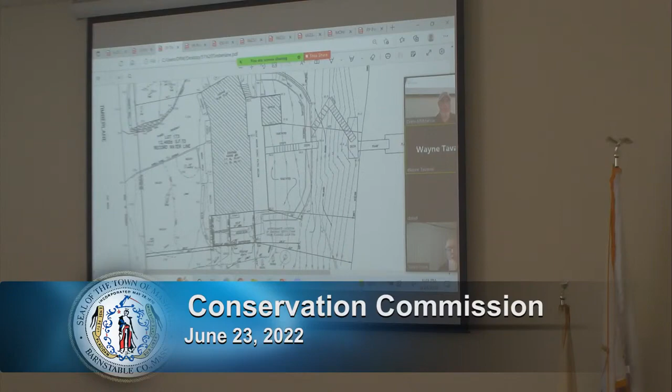There are some areas on the plan identified as vegetated. Right there, that is landscape area, ground covers, so it's not naturally vegetated. So between that area and the area in the understory to the south of the path, right there, are available, and we put notes in the narrative identifying that we'd like to work with staff to plant whatever native plantings are appropriate and commensurate with the addition we're proposing. I think that sums up my presentation, and I'm happy to answer any questions.

Thank you. Drew, comments? So just to show some images of the site—it is pretty steep. It's inland bank, the resource areas, buffer zone to top of inland bank.

If you haven't been out to the site, It is a very well vegetated inland bank. There's no erosion concerns on this bank. I don't even think there's been any disturbances for maintenance around the existing stairway, which is shown on the plan here. This is the access to the dock. So in this area of the bank is very well vegetated.

As Mike had said, using the calculation formulas, it's calculating out a square footage that the property simply doesn't have space for. So what we discussed was coming up with a plan to use the available space for mitigation. It's mostly shady, so we'll have to look at shade-tolerant varieties of native species and come up with a mitigation plan, which I put in my recommendations as a condition of approval.

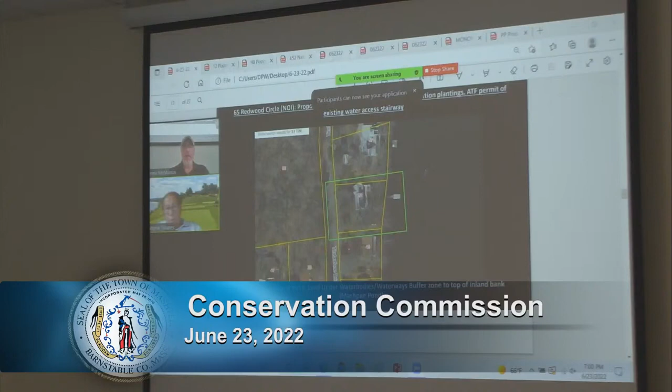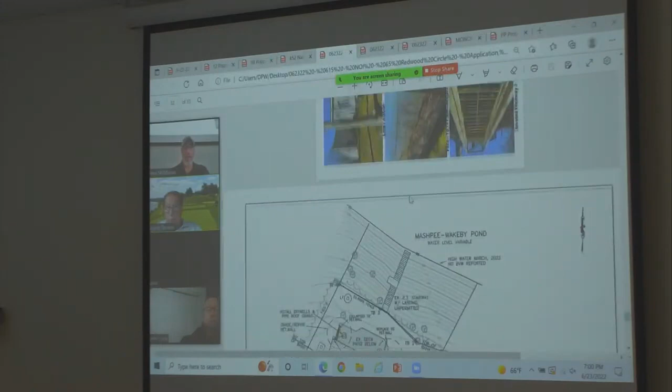Okay, I've got the existing conditions and proposed plan up on the screen now. Can you see that, Wayne? I see the map. Okay, that's the site plan. I'd like to see my plan if I could. The proposed? Okay, thank you so much.

So again, they're 50 years old. The owner had thought they were grandfathered. And then in the course of discussing with Drew, he mentioned that 4 feet is a legal width for these type of stairs, and that he would like to see proof that this landing would be cut in half to the 4 foot width. Was that it, Drew? Is that what you were thinking on that? That was the only issue I had that we hadn't discussed, and it was something I just happened to notice on the site visit that I didn't see the first time around. I just didn't pick up on it. So, yeah, in order to keep the stairway in compliance with the standards of design under the bylaw, it has to maintain a width of 4 feet.

The only exception to that is when you have a jog that's necessary to avoid trees. Again, that would be a 4 foot, but this is just clearly a platform, so we want to make sure that we're consistent in this approach for standards of pathways, stairways through naturally vegetated areas. Sure. Okay, thank you so much.

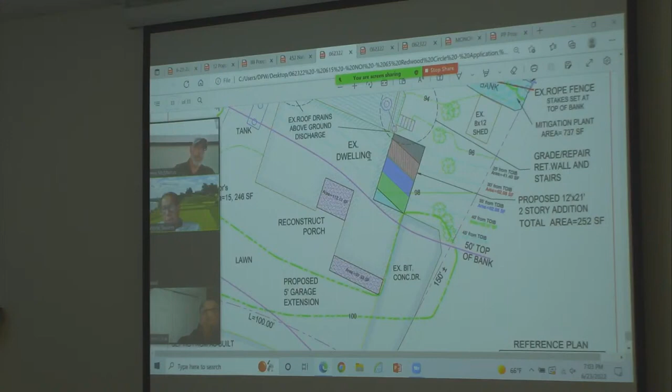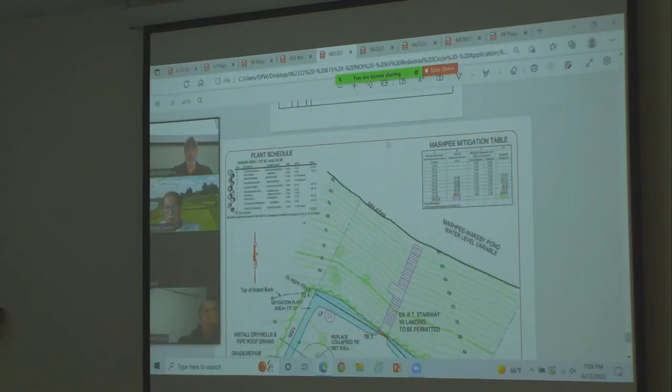Could we scroll up a little bit to the tables? I use your formula, the every 5 feet formula. It's on the right-hand side, Mashpee mitigation table, if we can blow that up a little bit. And all these areas were documented. Oops, sorry. Blew it up a little too much. Not sure what's happening with the image. Sorry, Wayne, yep, a little out of focus. Let me go back and reopen it and see if that works.

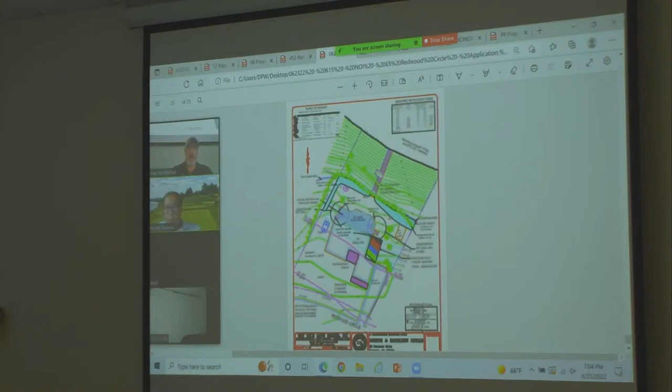Drew, I'm going to try this. Oh yeah, you're doing it now. Okay, sorry, I'm not sure what happened to the image quality there, but we all have a hard copy we can flip to and have hard view copies too, Wayne. Okay, alright, I'm going to try to do this again. Do you mind signing off, and I'll try to get on? I found mine, sure, you're ready. Ready when you are. Okay.

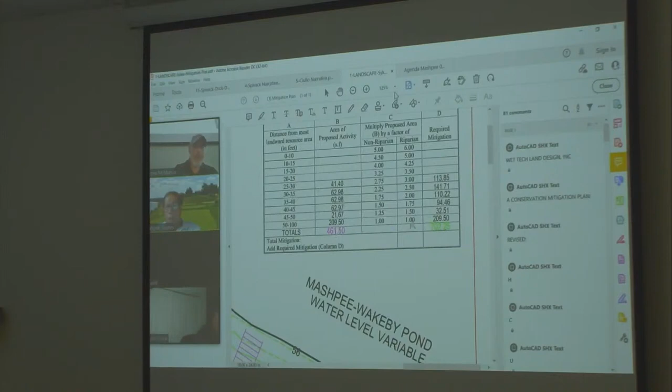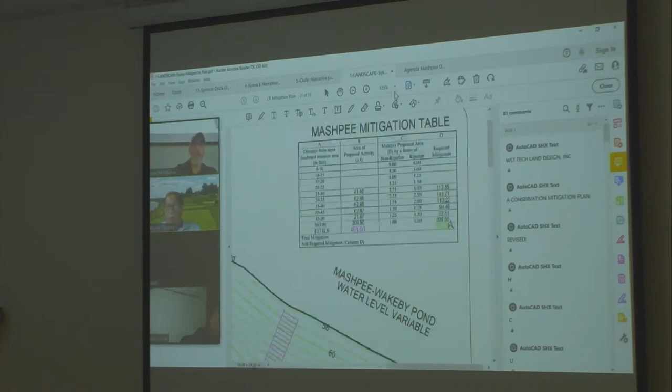Okay, we're here. So that's the table, and I went every 5 foot, as you mentioned, 25 to 30, and 30 to 35, so on and so forth. And we came up with these totals, and the corresponding, we used the non-riparian formula here, 2.75. All that comes out to 702 square feet of mitigation that's required. So am I doing okay with this? Yeah, moving around? Yep. Okay, so we have a shrub table here that we also did.

I like to do the shrub table with the spacing and so forth. It shows that 702 square feet are required, 737 square feet are provided. We have 29 total plants, with the list of botanical name, common name, size, spacing, etc. Everything that should be used.

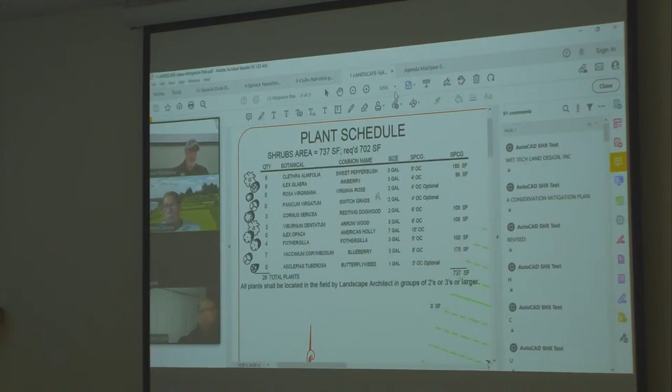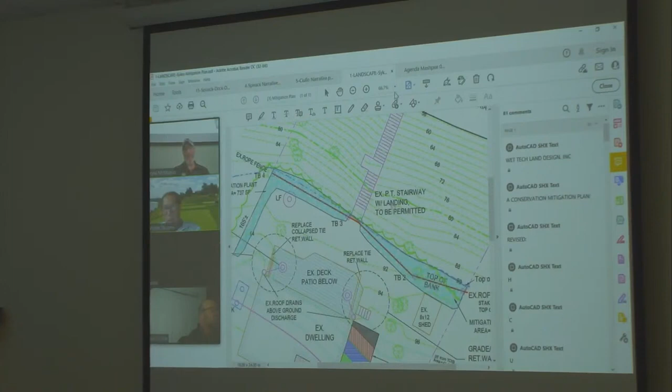The light blue area, or if you use AutoCAD, they call it cyan, is the area of mitigation that equals 737 square feet. This area is divided into 5 foot increments, each one colored so you can see the difference in area. We need to remove one tree.

It's to the right for access to this area. The owner is also asking about a double tree out here by the existing 8x12 shed. This just came up. One of the two trunks on the twin is decayed, and we would like to have that removed at the same time the tree in the front is removed. So two added features that don't show on the plan we'd like to bring up at this time.

Other than that, we'd like to get credit for the 112 square feet that is already covered. It's coverage already, just to be built upon with the addition. We'd like to change the table and reduce mitigation as any owner would like to do.

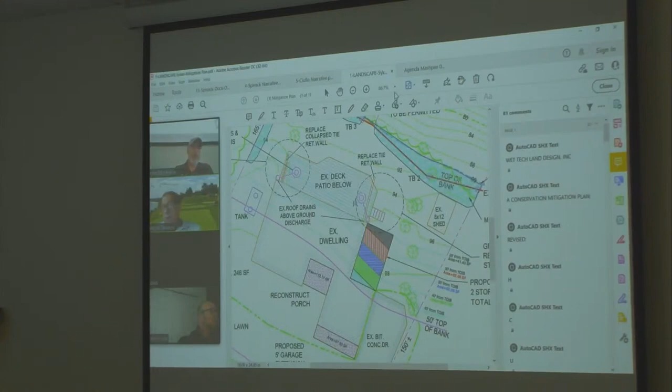That being said, we also have a wall here to be replaced, part of the landscaping, and to put in a dry well. Same thing on the side, existing roof drains with above ground discharge, and we'll make this site better in compliance with stewardship that belongs to this property. So if there's any questions, I'd be glad to entertain them.

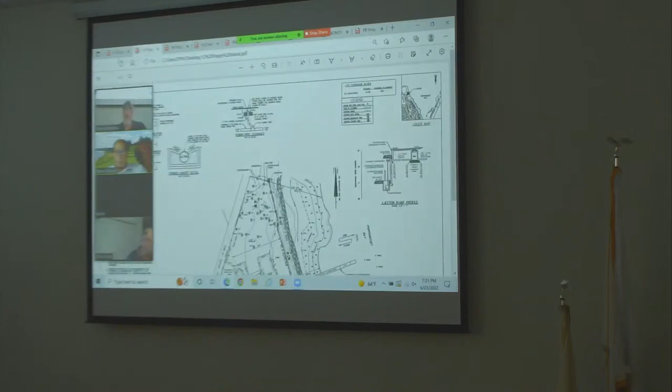I'm trying to find the... I can stop share, Wayne, if you want to share again. Let me try it again, if you don't mind. Sure. I hope you have it, because I don't have it. Oh, you don't have it? Oh no, I'm not sure why it's not on my... it wasn't included in my presentation. Huh. Let's see if I can bring it up. I brought it up on my screen, but that's not on your screen, correct? Not yet. Let's see, should be able to share since I stopped share. If you... yeah, I know. I just, what's up? What happened here? Hang on.

Trouble is I can't move the screen, I've got everything listed and up. I just can't. Tell you what, Wayne, we're starting to approach the hour-and-a-half mark. If you'd like 5 minutes to sort this out, we'll let anyone in the audience or on the commission, namely myself, who has to use the facilities, to do so. Okay. Well let me try to work it out while you go 5 minutes early. Okay, how's that? Sounds good. Thank you, let me see what's going on.

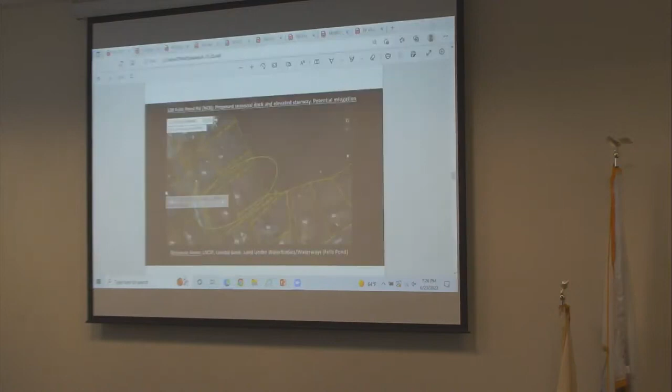No, I think what I did is I saved over it. So if you can bring up yours, I saved over it, that's why it came up. Yeah, my bad, yeah, hold on one second. Just give me one moment, I'm gonna see if I can find it here. Okay, it's really annoying.

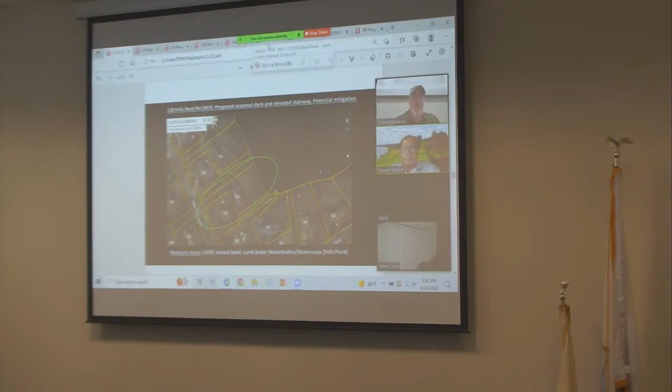There it is, all right, I got it. Just give me one second to get down to the plans, blow them up to size, and we are good to go, Wayne. All right, good, okay, thank you, that was easy. And it's not that blurry, took a while.

Thank God, okay, I'm going to go through this. Is everybody back from the bathroom? Yes sir, thank you, all present and accounted for. Okay good, thank you for your patience with me.

I apologize, this is a project with two components. Drew will show you some pictures before, but let me explain these two first. We're trying to replicate, thank you for blowing that up, I have a cross-section. There's some existing in-ground timbers, like the landscapers used to do in the old days. They've been there for, God almighty, this house is another 40 or 50 years old, and they're badly eroding.

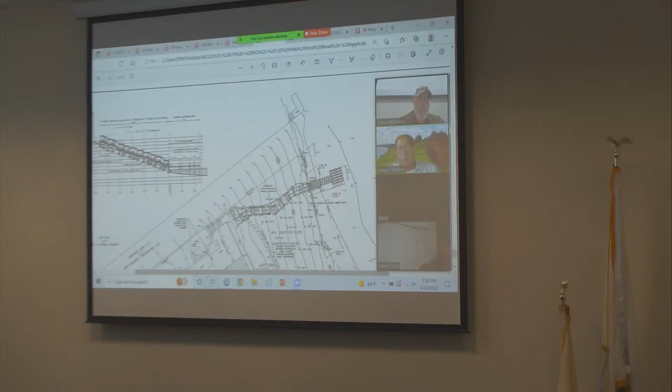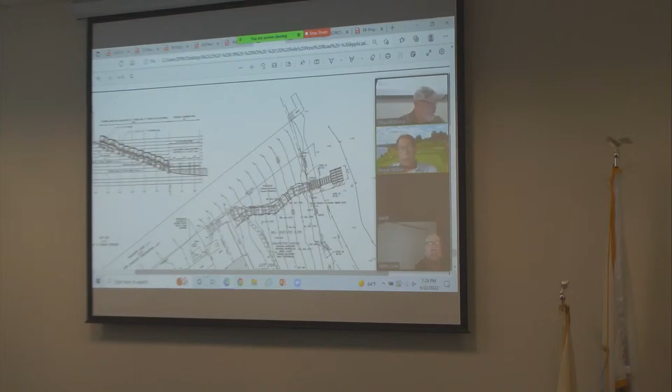They were never put in properly. They're undermining at 8 inches, and the ramp down to the next step is another 4, so you're getting a 12-inch step. The erosion is to be corrected using an elevated stairway, as seen in this cross-section, and you can see it. We're putting diamond piers in because the slope is less than 3 to 1, so we can use actual diamond piers. There's less intrusion, less coverage of the ground. It's a vast improvement. It shows the platforms and the steps that need to come down.

I think it's 7 feet all the way up to 24. So 20 steps, 21 steps, something like that are in here. And I call it out somewhere on the platform. There it is, 29 riser steps are calculated with 7-inch risers and 12-inch treads plus platforms. You need the platforms only because of the steep grade, very steep to walk down, but when you're building steps, they're very shallow. So you have to come down a few steps to a platform, down, and so forth.

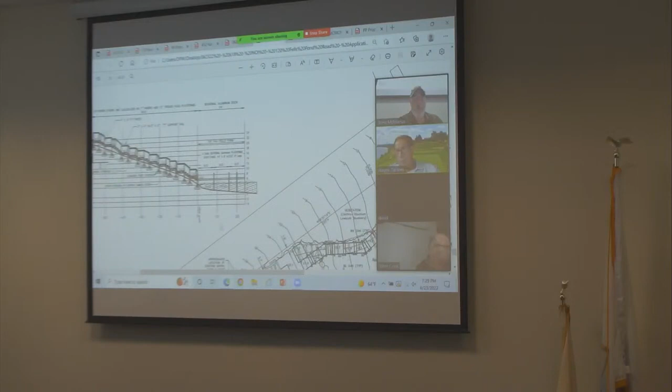So I show the elevation at each point, and then at various points only, we are putting these diamond piers that you can see in the bottom. So this is sort of a self-mitigation type of project because it's promoting no erosion. We are capping off the ends of these ties. If we take them out, it's going to create a problem. We're going to put more crushed stone underneath, and we're going to make sure that the outflow here, there's no erosion and none that's been caused before. So it's a self-mitigation type of project.

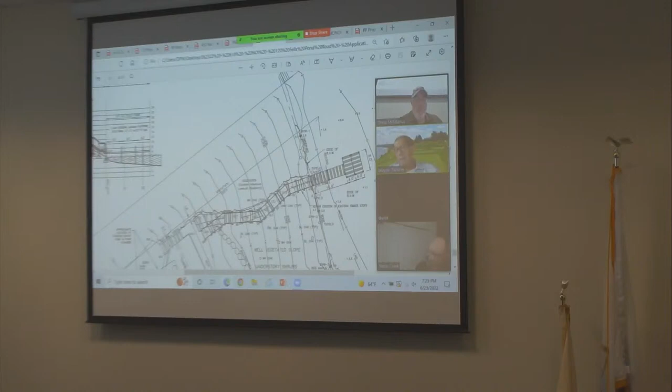Then it leads to a dock. The dock is shown here as panels. It's a seasonal dock. They're 4 by 8 panels of aluminum, very stereotypical of what has been used for seasonal docks. They have to be pulled out every year.

The neighbor has some to the north. If you can scroll down a little bit, and scroll that way too, there's another neighbor with his dock. That dock is out 24 feet, by the way.

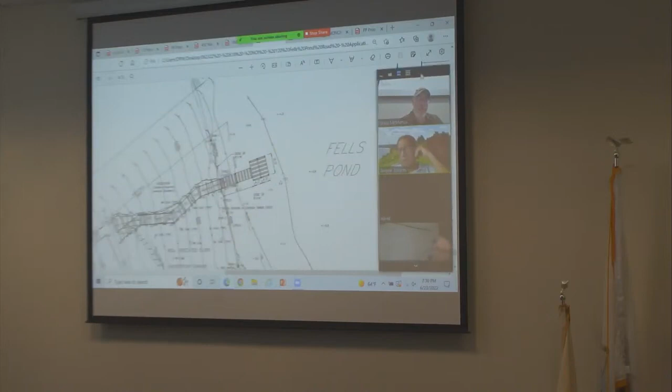This dock is out 24 feet. A lot of the towns we work with, including yours, want a 2.5 to 3 foot separation of the bottom of the seaworthy vehicle, whatever it is - in this case small kayaks, canoes, etc. So we put in one panel 4 by 8, a second panel 4 by 8, showing in the 16-foot range, and then two 4-foot panels across that T-bone to the original ones going out, with another 8, plus 4 plus 4, makes 24 feet out into Fells Pond.

You can see by the bathymetrics here the shoreline falling off in this plan. It shows that 4.2 is the elevation of Fells Pond, and we're at 1.1 just below this. So 4.2, 1.1, we'll get a nice 3-foot clearance with no problems with the bottom of the pond.

The panels are shown at the bottom of the plan in pictures so you can see them. I'm sure you're all aware of them. If you want to scroll down - one of the neighbors set a precedent, he's already in there 24 feet, so apparently that's a good distance to be in.

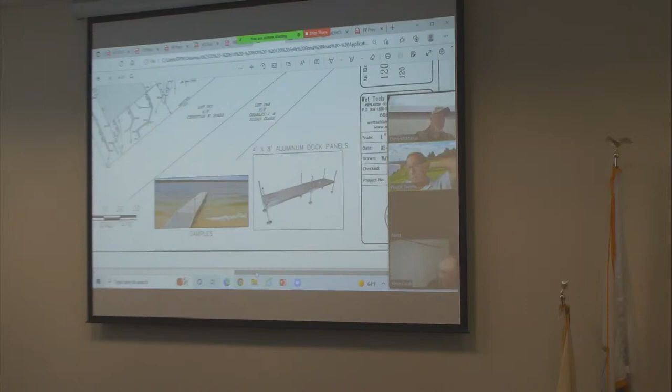These are the panels. They're on shoes that sit down and are self-adjusting so they stay level. There's no permanent harm to the bottom of the pond, and they're removed every year. They're attached directly to the last step or platform, the platform I mentioned in the first part of this.

So trying to keep it short, thank you for all the time you've given me. Thank you very much. Any questions, I'll be glad to entertain them.

Thank you, Wayne. Drew, comments? Just a few things.

Project does meet the performance standards. Fells Pond, as I'm sure the commissioners are aware, is not subject to Chapter 91 jurisdiction. There is no harbor master review - it's a privately owned pond. It is not a water body of the Commonwealth of Massachusetts because it's under 10 acres in size.

The proposed walkway is definitely a better situation than the current at-grade timber tie series of steps, which are currently eroding with root systems being exposed. So the least intrusive way to deal with this access is to build right over the existing steps with the elevated platform, and those diamond piers really reduce the amount of impact digging associated with the supports - certainly a nice feature to reduce impacts on the bank for the stairway.

So no shellfish resources in Fells Pond either, so there are no shellfish constable comments. The one thing I did want clarification on, Wayne, is in your narrative you weren't sure if trees were going to be removed or not as a result of the project.

The lawn area is being kept under the 10% requirement under your Regulation 31, so that condition has been met. As I'm sure you're aware, Willow Bend is on sewer. They have their own wastewater treatment system, so there is no septic system here. We have proposed dry wells for all roof runoff in the patio areas. So again, I believe the house proposal is straightforward, just providing you the detail.

Two things have been added, and I discussed them with Drew initially on the best way to bring them forward, and he agreed to do that as part of the amended order: the applicant would like to do a soft path down to the water's edge and a kayak rack as shown on the plan, and also vista pruning. All of the vista pruning will be done once house construction is underway. It'll be reviewed with staff on site for the appropriate areas for the vista pruning, and that will follow your Regulation 29 protocols and stay within that.

So I believe it's fairly straightforward. As I had stated, the limits of work have not changed, and I believe we have continued to meet the wetland interests, and they will remain met as was approved last September. With that, I'd be happy to answer any questions you may have.

Thank you. Drew, comments? So this is the aerial image of the lot, kind of a strange, pork chop-shaped lot. You've got some area that's always been maintained as part of the golf course access here, where a large portion of the house footprint and associated hardscaping is proposed.

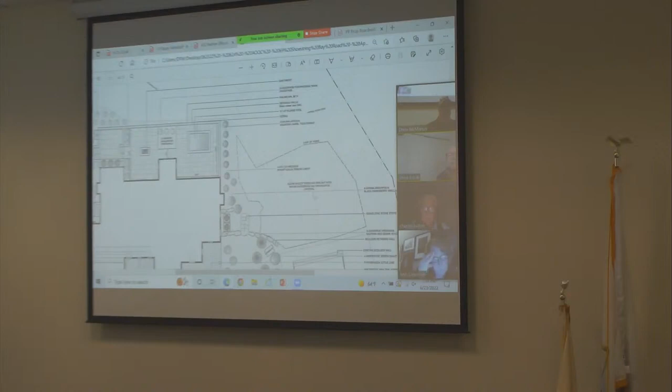So it's a clear, select trees and replant with native evergreen and ornamental material in this section here. Go back to the image, I believe that's kind of like in this. Right, that's correct. If I could maybe just expound on that a little bit.

The right just uphill of that, there's a large pump station there as part of the wastewater system for Willow Bend. Just below that, as the house goes in, what they're looking to do - and again, we can review it on site with you, Drew, or another staff member - is remove certain pitch pines that might be hazardous as construction is going on, just selectively, and then plant all of those areas with native buffered shrubs and other vegetation to actually possibly enhance that area. So that's what the intent was there. It wasn't to go in and just clear-cut, and again, we do that in consultation.

So you're saying it's a concern over potential construction impacts that may jeopardize or compromise the health of the pitch pines? Yeah, well, and also the pitch pines as far as the hazard of them coming over potentially.

And then with that pump station, when Shoestring Bay Road was constructed and the pump station, right on the downhill side of the pump station they actually built a stone wall there, so there's been some grade modification there. So it's really just looking at some of those selectively. If we could condition it that way - only with approval by staff - if you look at it and say no, we don't think you need to take any of these out, then that would be what the condition would be.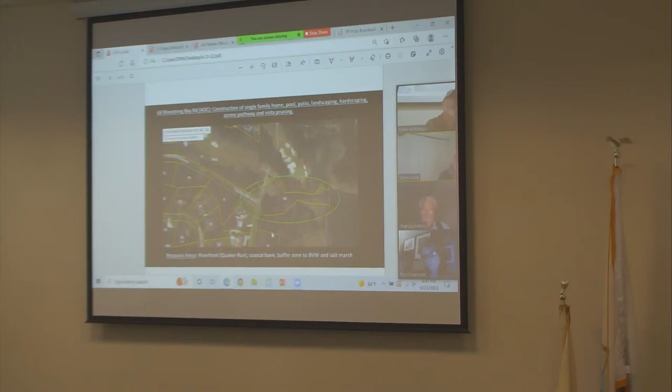Sounds reasonable. I think the other thing that caught my attention was the ornamental plantings noted in the plan for that area of selected clearing - I wouldn't want to see any of that. No, it would only be native ornamentals, it would be 100% native buffer if we were to go into that scenario.

So I would like to see a revised plan with that note, eliminating the word ornamental. Yeah, yep.

I'm comfortable with that being a condition based on an on-site assessment to kind of see what the situation is. I generally understand the pitch pines are vulnerable, but if they're healthy I wouldn't want to set a precedent to take them out just in anticipation of storm damage, because then you're looking at that kind of precedent applying to any property across town within jurisdiction. Understood. I understand the concern, but in the absence of any health issues with the trees, I wouldn't recommend removing them in anticipation that they're susceptible to storm damage, because you could make that argument for any tree out there. So the approach of going out and assessing it and looking at it is fine, I don't have an issue with that.

So what would your condition sound like? I would recommend approval of the amended request with the condition of an on-site meeting with the consultant to assess this vegetated area for potential tree removal. Questions and comments from our commissioners?

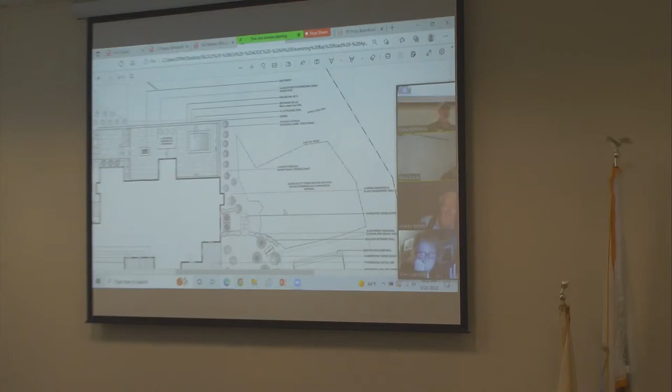Oh, I'm sorry, the other thing is we do want to see - because I know you're waiting for the house construction to finalize - the Vista corridor juxtaposition. It's mentioned in your narrative that it's going to be 50% of the width, but it doesn't really show on the current plan, and I know you're just waiting for the optimal time to determine that, so that would also be a condition. Yes, absolutely.

Questions and comments from our commissioners? Mr. Colombo? I'm looking at the proposed driveway, and I'm just trying to envision the water coming off of it.

This leach basin, is that on the surface? That leach basin is not intended to pick up the driveway runoff - I believe you're talking about the one just to the right of the garage on the plan. It would all be stabilized there. There's already a gravel road that goes through there that's part of the golf course, and that's going to be modified.

If you can pan maybe just a little bit to the right, Drew - right about where his pointer is, that's the low area for the driveway runoff. So I'm just trying to think what would be the best approach. I probably wouldn't tie it into that leach basin, but what we could do is create just a small inlet there.

I mean, is a catch basin necessary? I'd like to not put a catch basin, but I could put a catch basin and then tie it to the leach basin. I'm not sure that the catch basin is necessary, but if you feel that's needed, I'd be willing to add that to the plan.

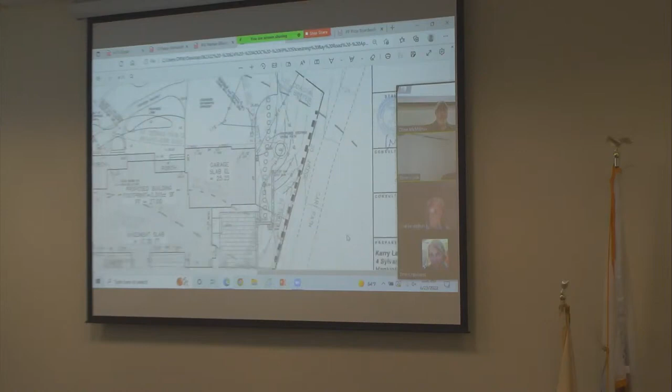And then there's also the additional vegetated buffer to the northeast, I'll call it, to the plan right, and that's all golf course to the far right there. Yeah, there's a T actually, to the left or right of that a little bit more in back. So there's actually some drainage pattern along that cart path just off the lot for the golf course, so the runoff from the driveway would be meshing with that. But we could add something at the driveway to help intercept more of the runoff.

I'm just thinking the kind of rains we get now - we don't get normal rain anymore, and that's a big area. So there's going to be some water coming off. Yeah, we can do that, and if we could do that as a condition, I'll make that change to the plan, same with the note on the removal on the landscape. But if we could do that with a condition of approval, and get the revised plan to Drew for the file, that would be great. Yeah, absolutely, it's a good point. And you're right about the rains - it's going to get worse.

Any questions and comments from our commissioners on Zoom? If there's no one in the audience or online, we will entertain a motion.

This is an amended order of conditions with two proposed conditions - one for the Vista and the other for the arborist to look at the pitch pines, correct? Or meeting with myself. Or yourself. Consultant to look at pitch pines. Very good.